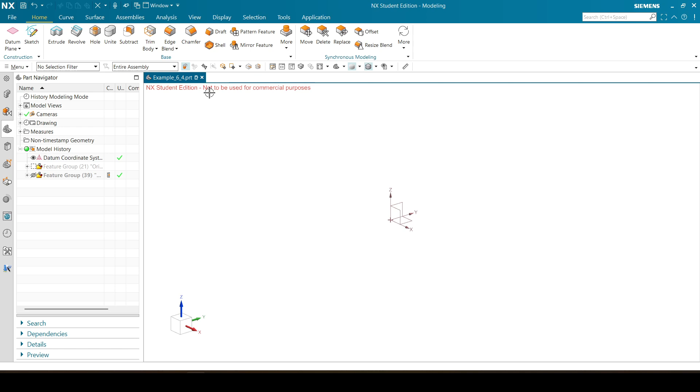Start in the front view, and then we're going to add those 3 circles. I'm just going to add them in roughly here, here, and here. The smallest one has a dimension of 70. This cutout has a diameter of 75, and the outside has a diameter of 100, all in millimeters.

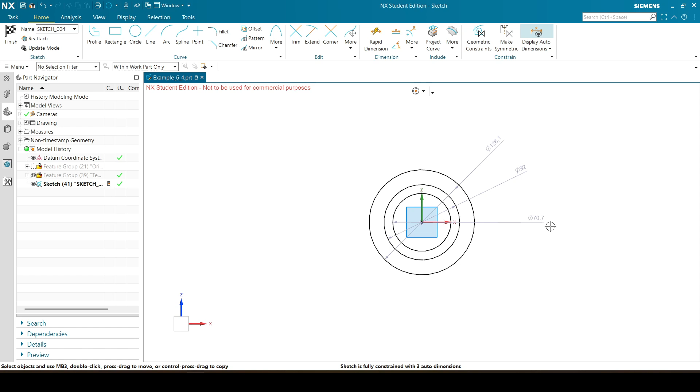Let's move these dimensions so we can see which is which. The first one's basically already at 70 - oh, it didn't apply, there we go. You can double click on them to edit. This one is 75, and this one is 100.

Now I'm going to add this bottom one. You can see its center is in line - well, this is all symmetrical about the ZY plane, it's all mirrored. But I'm still going to make the entirety and not mirror it. It's not too much effort to just do the whole thing.

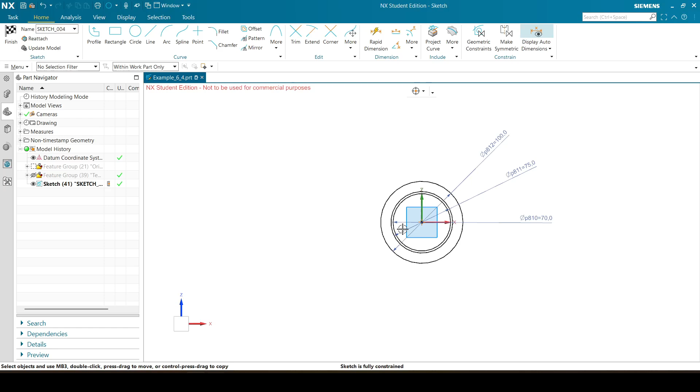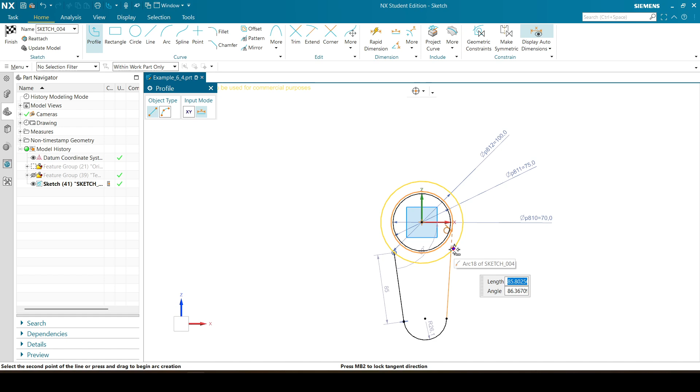The bottom consists of a straight line, so let me start there. You want to make it tangent - you can move it up and down and it will realize you don't want it tangent. But it's also not a straight line, it goes a bit at an angle. Then we go over into a curve, and another straight line that wants to make tangent to everything, but I'll put it in and remove the tangent constraint.

So, point on curve, get rid of that, and immediately delete that tangent before it becomes a problem. This should be in line with the z-axis, so I'll add that point on curve and make these horizontally constrained, which will cause this to be symmetrical.

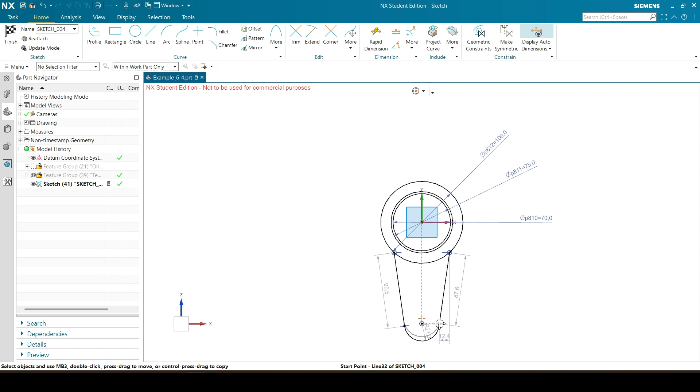I can see this one isn't exactly tangent over here, so I'm going to make it tangent. There we go, now it looks a bit silly, but this radius should be 25, so let's quickly change that to 25 radius.

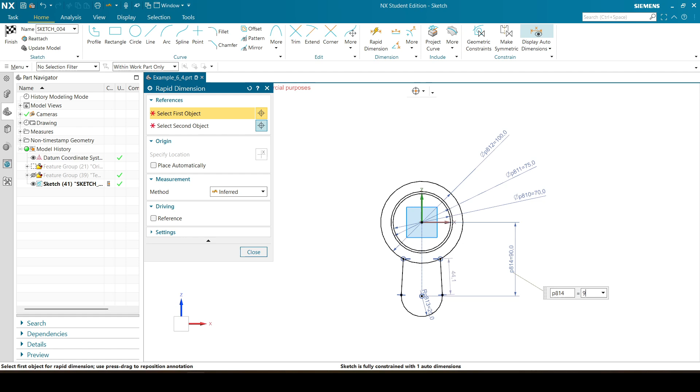The distance is 90 from the horizontal, so let me move this out of the way. There we go, so it's already basically 90, but now it's actually 90. And then we have the angle of this line, which should be 82.5 degrees, also from the horizontal. So 82.5 degrees, there we go.

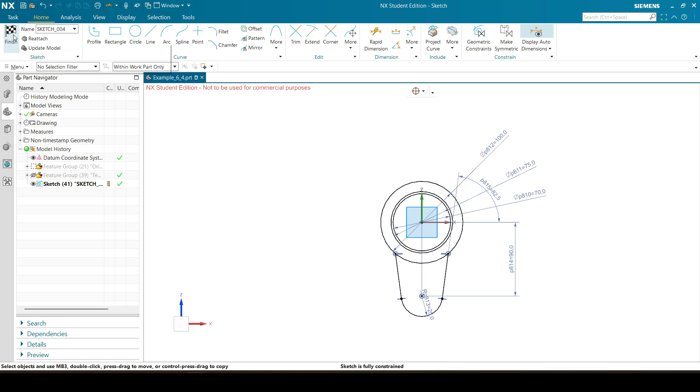Now that's fully constrained. I'm quickly going to show you, because we're going to add the hole here using the hole feature and not by adding a circle. But to do that, I need to add a point to this. The reason is, as I finish here, there's nothing here, so I can't add a hole feature - I'd have to add another sketch to give it a point to reference from.

Or while I'm in the sketch, I can say point, add a point there, close that, finish. Now there's a point that I can use for my hole feature. I'm just going to save it - it complains about the sketch, but it's fine. It's complaining about the detail drawing that's part of this NX file, but don't worry about that.

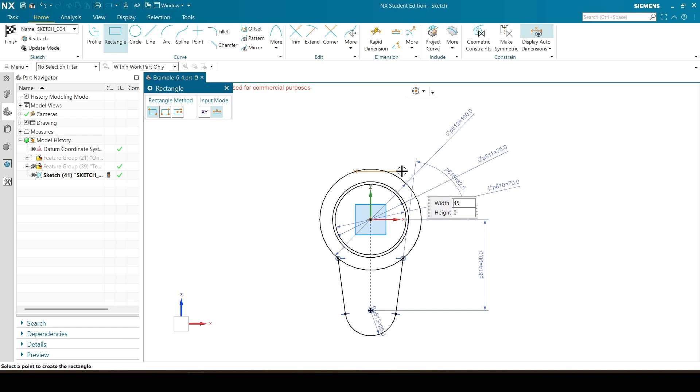Now the top part. I'm going to use a rectangle first to get my rough shape, and work from there. So rectangle, point on curve here. I'm taking it past this side because I want to manually make it point on curve, to be sure it is actually connected. I'm just going to put it in there, then make this point on curve - oh, I misclicked, let's try again. There we go.

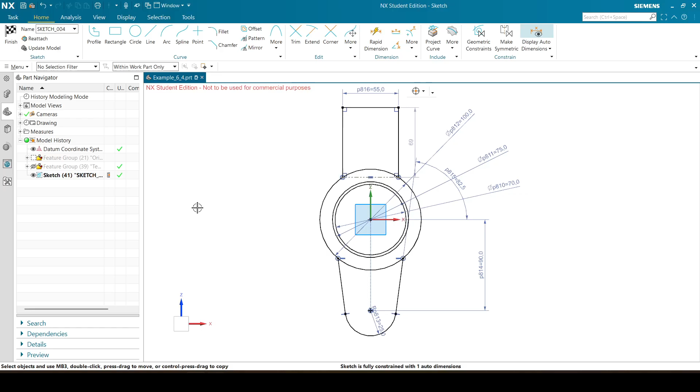I'm going to make this bottom line a reference line since I'm not going to be using it. Then the width is 55. And the height from the horizontal is 100. From the x-axis it's 160. I'll put that over here so it doesn't clutter things up, then zoom out a bit. That's better.

Now for this one, I'm also going to use the hole feature, so I'll add a point. I'll make that in line with the vertical axis, and it should be 105 from the x-axis. So 105, there we go.

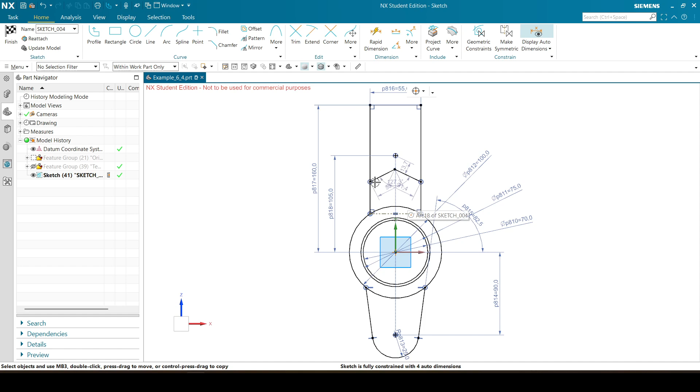Now for this little hat we have here, or roof, or whatever you want to call it, I'll use the profile tool and add it in roughly there. I'll say these two points should be horizontally constrained with one another, and they should be in line with the vertical axis. So now I just need to add this dimension and this dimension.

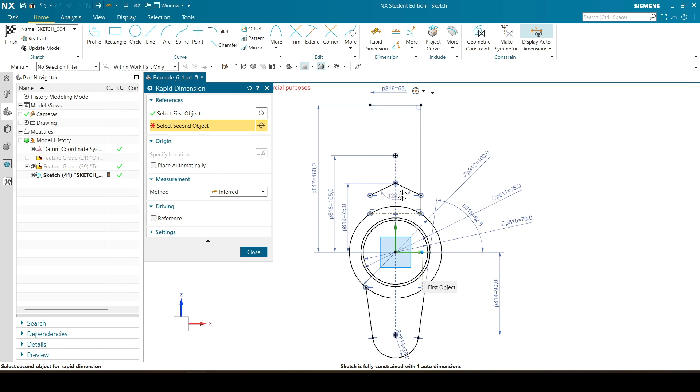So it should be 75 from the top. So from here to here, that should be 75. And the other one should be 60. This one is 60.

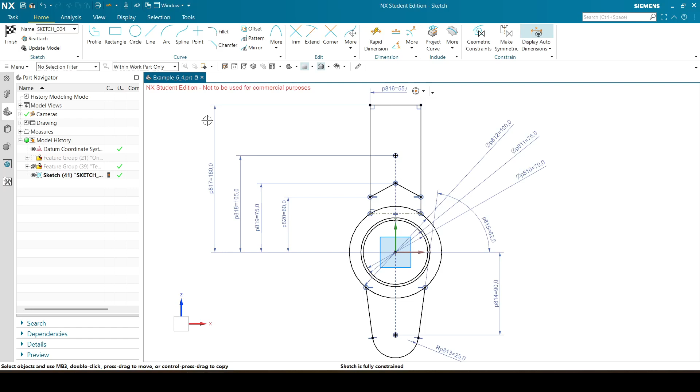Okay, now I'm just going to move these to the side so my sketch is not as cluttered. I'll also move these ones a bit upwards, put this over here, and move this one off to the side. So now I think that's all the detail I'm going to add on this sketch, so finish and just save it.

Okay, so now I can start by extruding. I'm going to first extrude the center part, as it is what everything else connects to. That should be extruded a total distance of 200 millimeters.

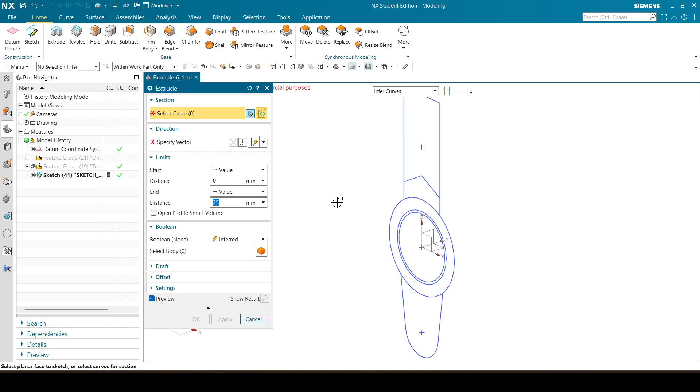So extrude - I'm first going to extrude the entirety without this cutout, and do the cutout afterwards. I want to use region boundary curves. I'm going to use that, move over to this side, zoom in there as well as that. So both of them, and that should be 200. Show result - yes, that is correct.

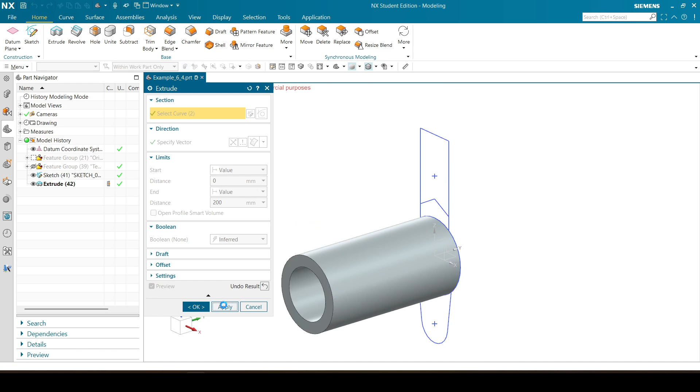Okay, so apply. Then I want to cut this out, but I don't want to select the face of the extrude, because if I change that extrude it could break everything afterwards. So I'm just going to hide it by clicking on the eye, and then select my little annulus here, then unhide that body again.

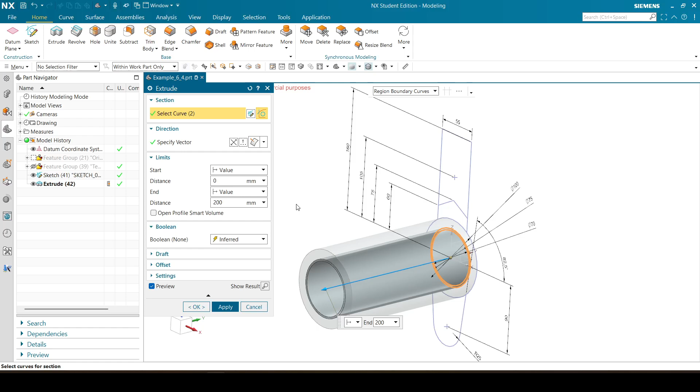And now I want it to be from 80 to 160. So 80 to 160, and it should subtract from that other body. There we go, here you can see it. I will add the radii later.

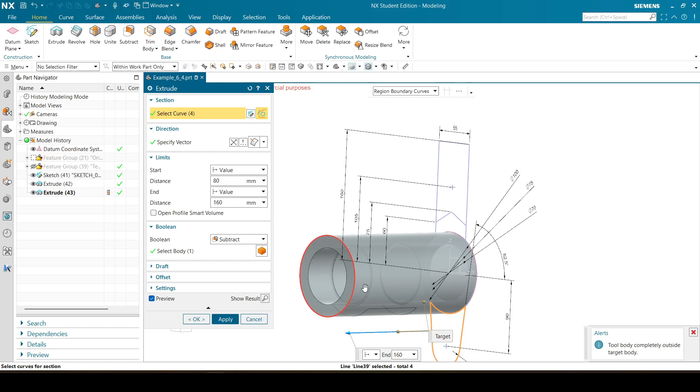Okay, so then I'm going to do this bottom extrusion. It's quite simple - it's that one, and it's going to go from 0 to 50. So from 0 to 50, and it must unite and not subtract.

So we can create only one of these and then mirror it to the other side. Okay, or you can make both - you must decide which is less trouble for you. If you make one and mirror it, if you want to make any changes, you can just change the one.

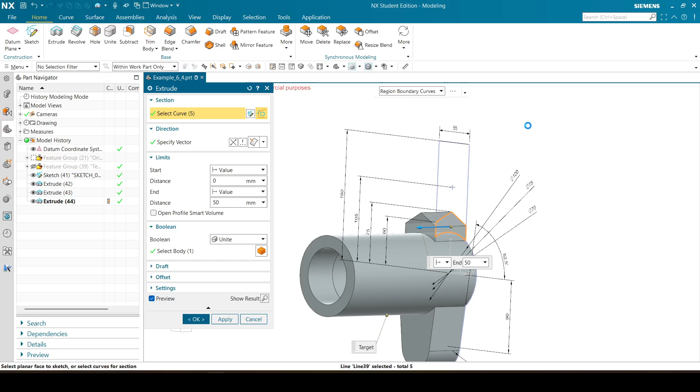Okay, so I'm going to first extrude - let's go extrude this one. So it's from the edge, and it goes either 20 or 40, doesn't matter, because it will be absorbed into this vertical one. So let's just make it 20. And it must unite it to this body. So that's correct.

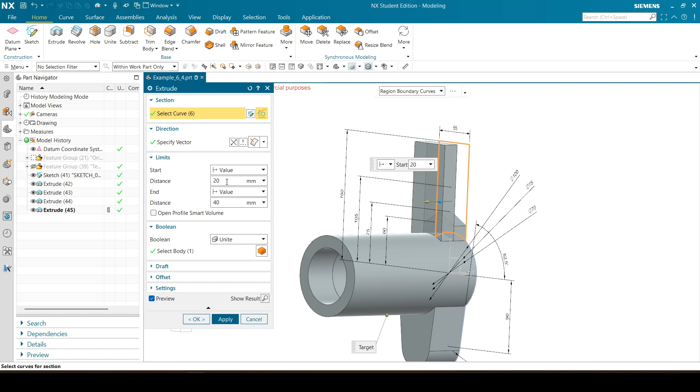And then we want to extrude both of that. So you can also extrude this bottom one 40, and the top one just the top part. You have many ways in which you can do it - this is just the way that I prefer. So it goes from 20 to 40. There we go, and also uniting it. Okay.

Now I'm going to quickly add two of my hole features. So first just this one, on that point over there. There we go, point of the sketch. Let's do that one, and it must have a diameter of 25. See, this moved up a bit, so it's 25 - yes, that's already correct.

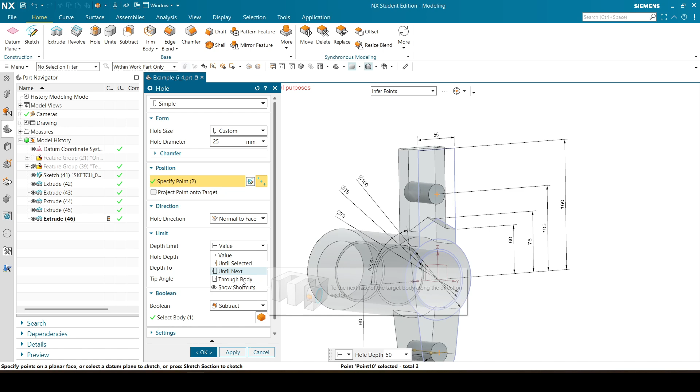And I just wanted the hole depth to be through body, so it subtracts from the body. Oh, and I don't want both points - I see it's selected both. I just want that bottom one.

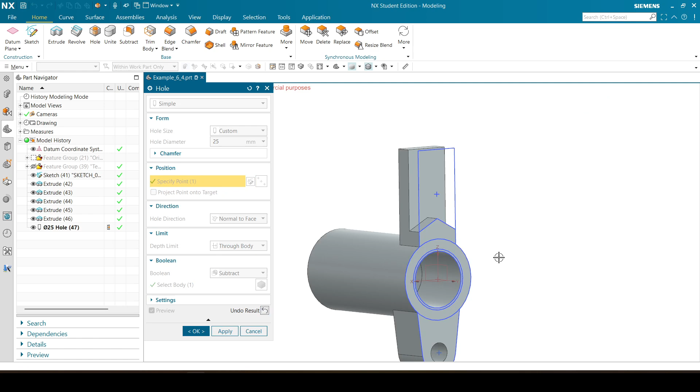I see this one wants to select both points. Okay, we just want that point. So just be careful that you don't select the wrong thing - that's why you preview your results. Okay, so that's correct, let's apply that.

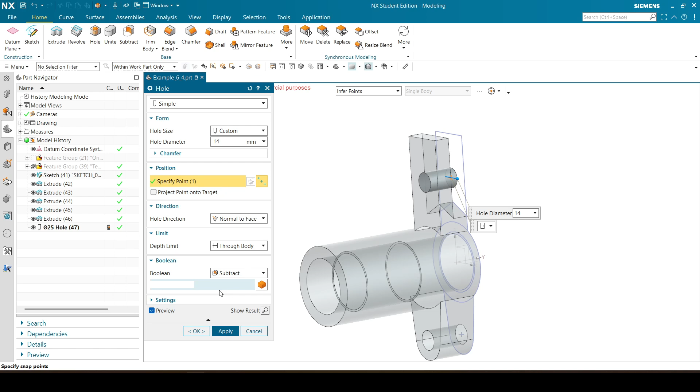And now the top one is a 14mm hole, so over there. And now it's selected incorrectly, so let's right click, select from list, and say this point. And all these are already correct, except this should be 14. Show result - there we go, apply.

Okay, so now to mirror this I will first need to add a datum plane. I'll add this from the XZ plane. Just unhide this again, and then the distance should be in the middle, so that should be 100, or 200 divided by 2. I'm just reversing the distance so that it's on this side. And the plane direction doesn't really matter because we're just using it for a mirror and not to sketch on.

So I'm happy with that. I'll just move it up a bit so that I can see it. Okay, and then I will mirror, and for that I want to mirror this extrude, this extrude, and this hole.

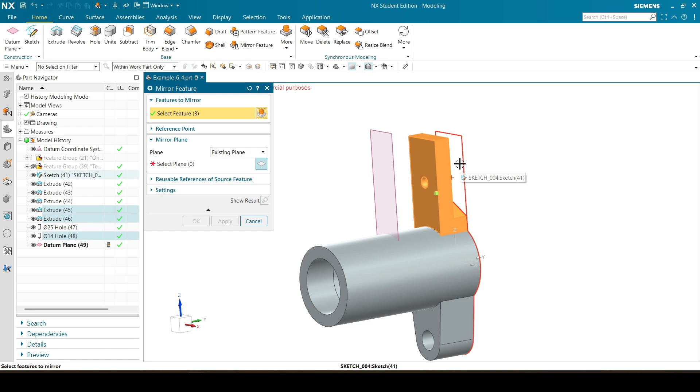So if a mirror gives you issues, so that the body doesn't want to be solid, then you must also mirror the sketch, but if it doesn't, you can just mirror the other features. So around this plane, show results - that looks correct. And to check that this is all one body, it should be, because this entire face sort of highlights itself, but you can just say solid body, and you can see it's all one solid body.

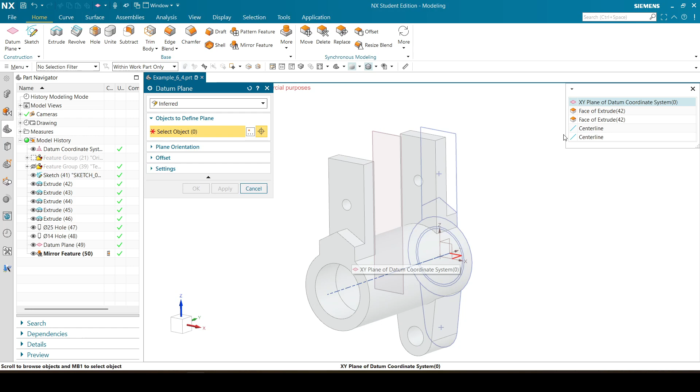Okay, so that's the majority. Now we want this bottom part. So let's see, its distance from the top is 65. So I'm going to create a datum plane there and sketch on that datum plane, using the XY plane, going the other direction, 65.

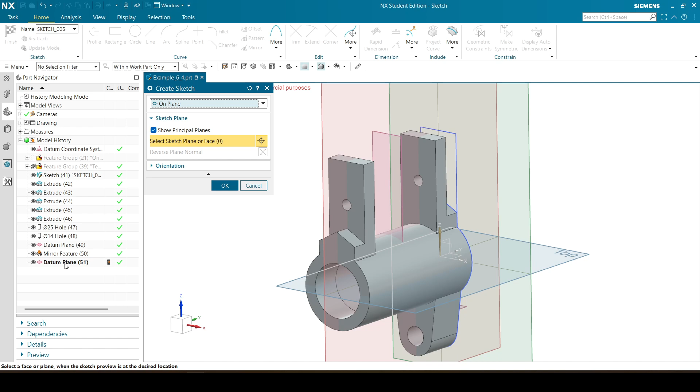And then I want to draw on the bottom. So you see now I'm going to be drawing on the top - plane orientation, I'm going to change that. See, now I'm going to be drawing from the bottom. So now if I say sketch on this datum plane, it will move me over there.

Okay, so this one, let's quickly see - so it is absorbed into this, and then it also goes into this top, but it's flush with that. So we must use our own initiative for some of the dimensions, just to make sure that it doesn't stick out over here or isn't connected, and so on.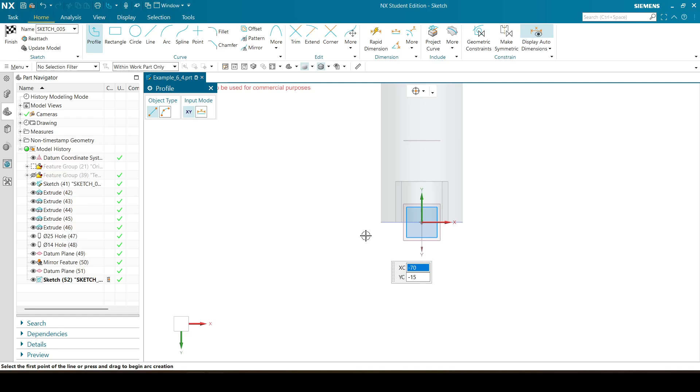Okay, so if we see here, the distance from this point to the center of this hole, and also of this radius, which you can see is indicated from the center, is 60. So let's first draw the outline, shall we? Profile tool, and let me just quickly see, I want to be on this side. So I'm going to just start over here, go up, arc, down, connect. Okay, this should be in line with the y-axis.

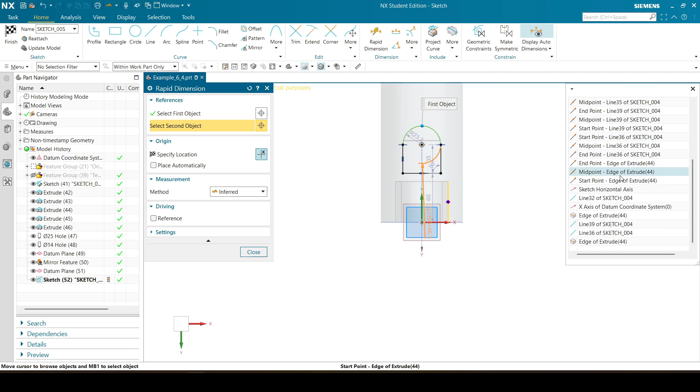So now our distance to that point from the x-axis - let me just quickly right click, select from list, and I want, there we go, the x-axis. So this should be, what was it again, 60? Yes, this should be 60. Double click, 60, there we go. So now I'll just close that.

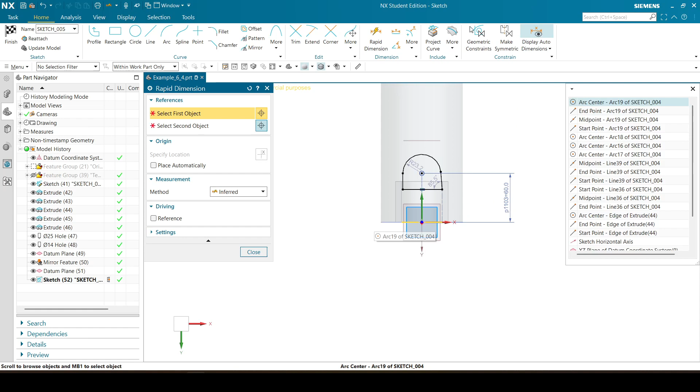So now this edge should just be within this. Okay, so I'm going to decide to make it flush with this. I'm going to make it 50, just so that it doesn't interfere with that other hole that we added. So we're going to go over here, select that, select this, and say 50.

Okay, now you can see it pulled this line strange because it's not vertically constrained. So select that, vertical. Now the sketch is fully constrained. I'll just go zoom out a little bit.

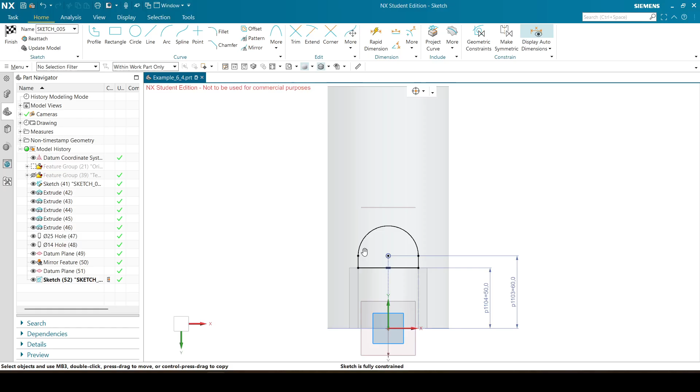But we also want to add a hole here later, so I'm going to add a point and finish that sketch. There we go. So now when I extrude that, I want to first extrude it the other direction, and then I want to go from 0, and now over here I can say I want to go until extended.

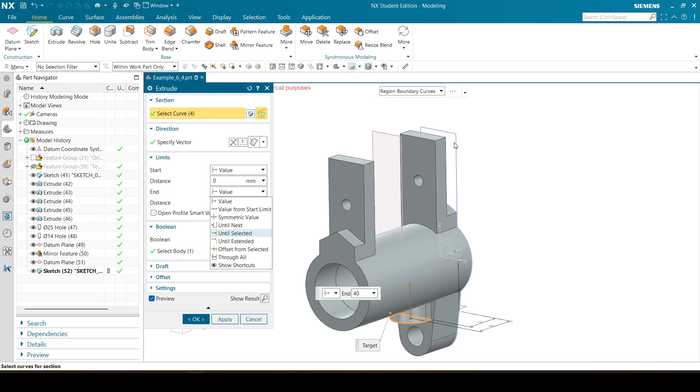Until selected and until extended will both work for this feature because it will be hitting this body. If you want to extrude towards a plane or a face, but it won't actually be hitting that plane or face, then you want to use until extended. But if it will hit it, until selected will work better.

So let's see, until selected, and then it should be this face. And here you can see it is working correctly, it's uniting it, and that will work. For this one, until extended should also work. Let's quickly see. Yes, so both of them work, but until selected is the correct one to use for this.

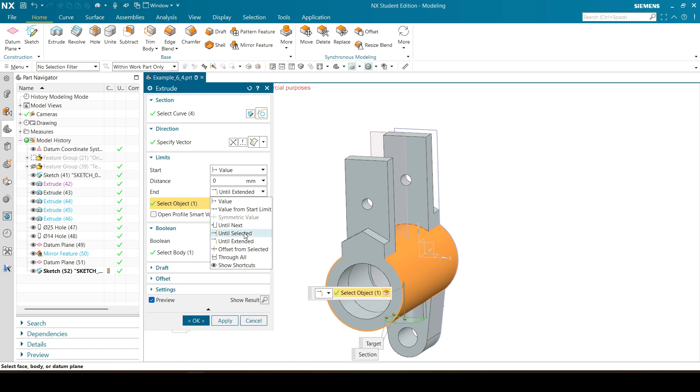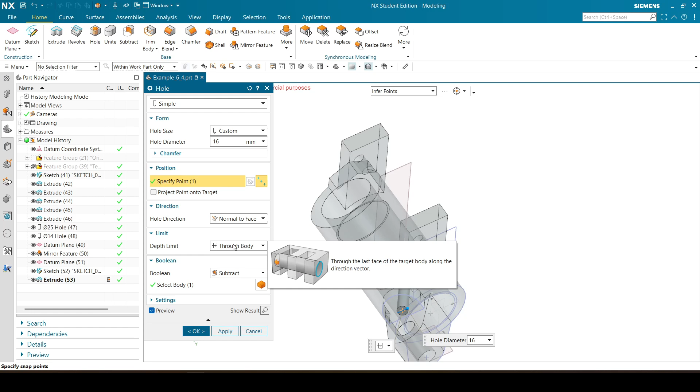Okay, so now that's in, and then I just want to add a hole on this one as well. So over there, I'm not sure it selected the point correctly, so let me just try again. Yes, that point, existing point, and it must be 16 millimeters. And I wanted it to go, so now we must be careful.

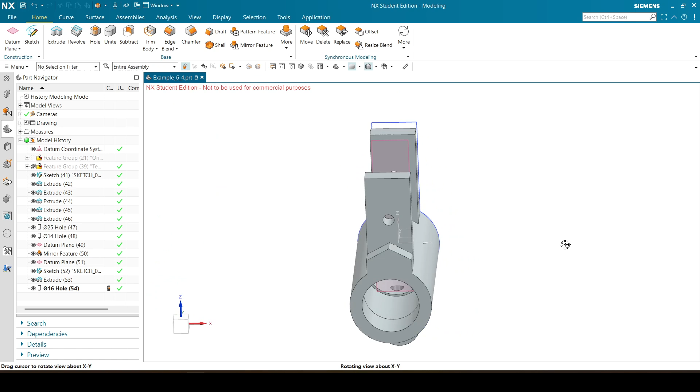It says through body, so now it wants to go through the entire part, and we don't want that. So now we can say until next, so then it's essentially until the next face that it hits, so then it will stop there. Or you can also use until selected, as we had for the extrude. I'll just say until next, subtract, okay, and now we have that hole only in the bottom.

Okay, now we are almost finished. Now we just need to add a bunch of radii. Oh, I actually forgot, I wanted to add the radius here before mirroring. So I'm just quickly going to suppress a few of these, up till the point here, because I want to add a feature that's not dependent on them.

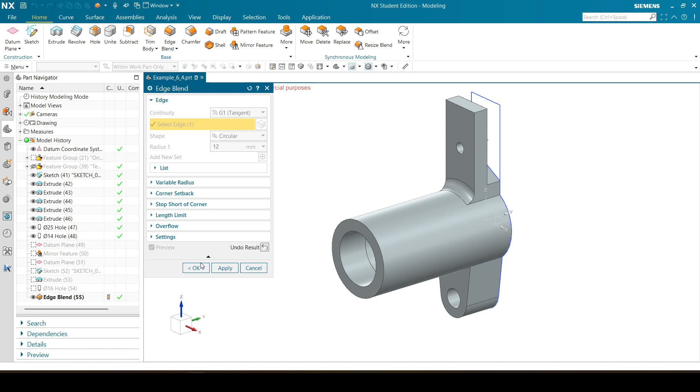So the safest thing is to suppress them, then add my edge blend, which has a radius of 12. So type there 12. This edge, just click there for it to update. Show result. Okay, that's correct. Then we're going to move it up and then unsuppress these.

Now you will see it did not mirror because it is not selected in the mirror. So we just want to hold control and say we want to mirror that as well. Okay.

So now we can add our edge blends here at the bottom. So this one over here has a radius of 10, and then these smaller ones at the sides, and you can see it's all connected going over here.

I'll give you a check there. Actually, no, this one has a radius of 12, and these ones have a radius of 5. So always check very carefully if they are the same or not. So those ones are 5, that one is 12.

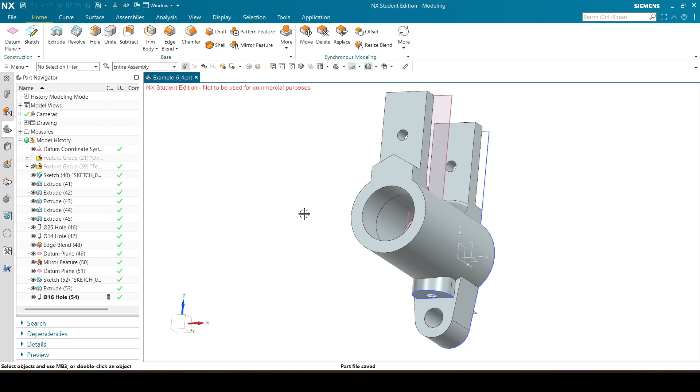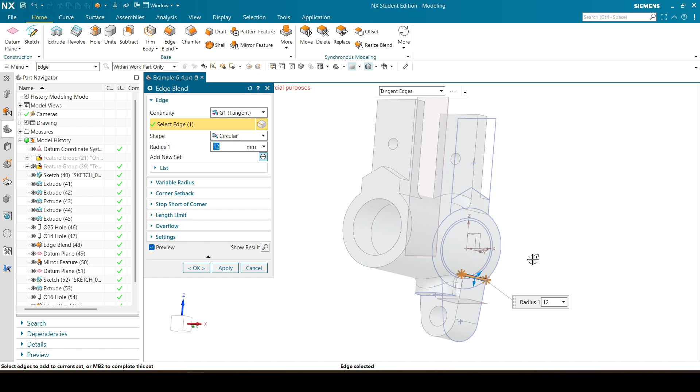Okay, so edge blend, this one is 10. Show results. Okay, apply. Then we want to say 5 for those ones and those ones. Apply. And then finally 12 for this one and this one, showing a result. There we go.

Zoom in a bit. Okay, that looks like it all applied correctly. Okay, so I'm going to save it real quick, and then I'm also just going to hide some of my sketches and datum planes to tidy up my sketch a little bit.

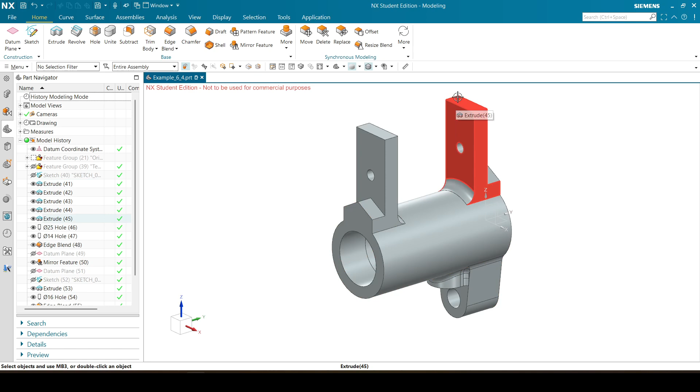Oh, I almost forgot this inside one. Okay, so let me quickly add a section plane in here. So I'll quickly see here. It was at view. Here we go.

Okay, so I'm going to say edit section, so it will then automatically want to create for you a section, and it already, so now you can see I can select different planes that I want to cut it from.

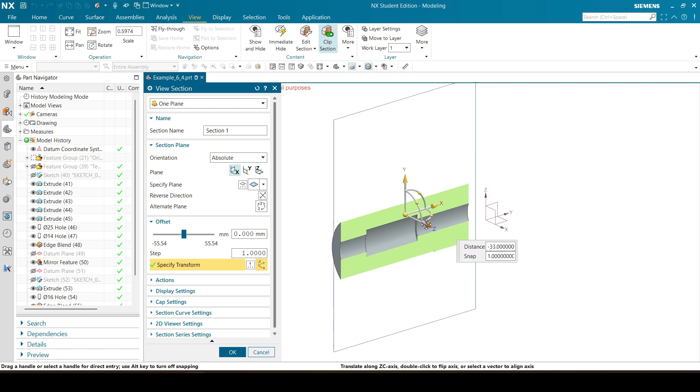So I want this plane so I can see this cross section, sort of like this, and then I can move it this way or this way, but I want it to be in the middle. Let me just check here. Okay, it's already in the middle there, that's fine. Say okay, and now I can add the 5mm edge blend.

So just say 5, otherwise it's going to be too large for the actual geometry. 5 over here, 5 over there. Just be careful to select the right edge. There we go, the inner one.

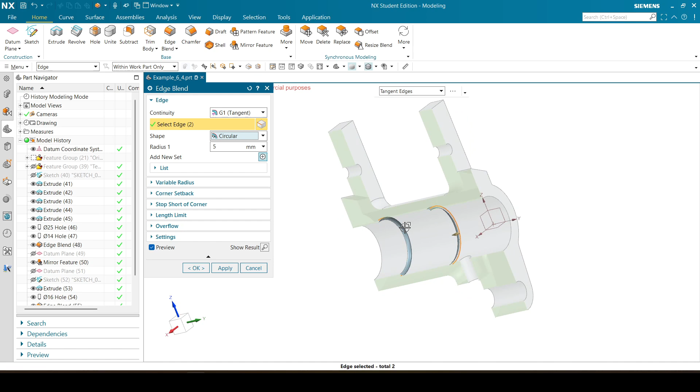Okay, so now that's correct, and now I can just say in the view, clip section off. So then you see it is correct. So essentially that just hides half of the sketch, or that part that's clipped off, so that you can actually see on the inside and make changes over there.

Okay, so now the material that we applied, so now to check if we actually did it correctly, moment of truth, is the material AISI 304 annealed, stainless steel. Solid body, this one, there we go, and it's this material. So I used that for these ones as well.

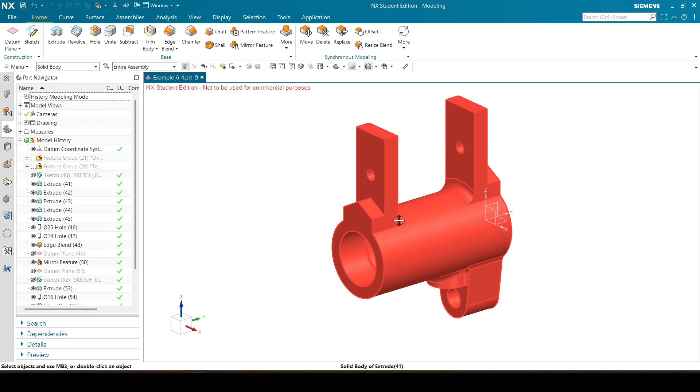I'll just suppress them for now. So that one's correct, and now I want to measure. Where am I? There we go. Measure, select from list, solid body, and I want all of these ones. Okay, so this is the one that we already have, and now to unsuppress the original feature.

So these should now be the same, and they are not the same. So now the fun thing is to figure out why they're not the same, because they are supposed to be the same. Okay, so this is indicative of me missing a feature. So let's quickly see which one I missed.

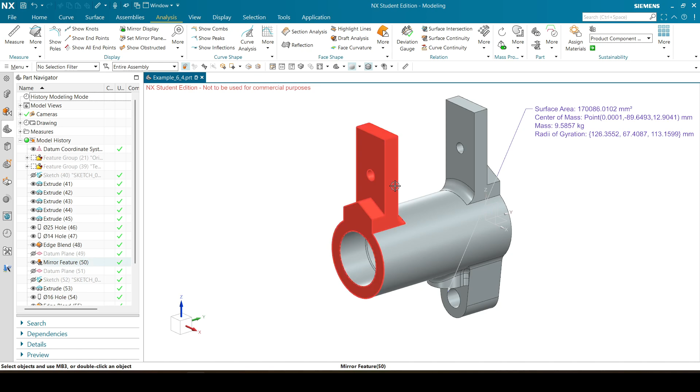I'm first going to hide or suppress this one again. Actually, yeah, it would be kind of unfair of me to just see what's not the same between the two and try to figure it out, because you don't have that option. So let's go back over here and see what we missed. I'll spare you the pain of watching me read through everything, and then I'll just quickly pause the recording and come back to you.

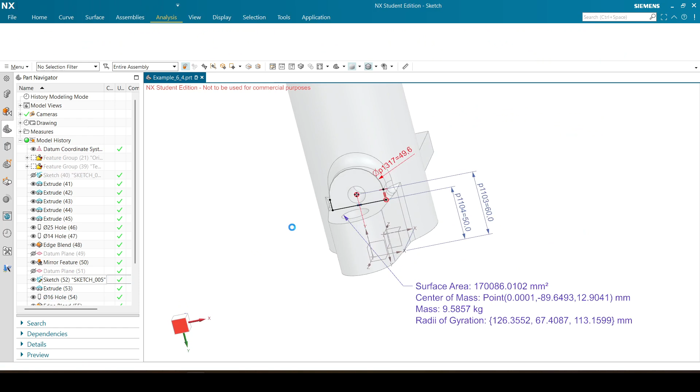Okay, so I'm back. I realized what I did incorrectly. You can see here, if you look at the relationship between this little circle and this arc, just get the correct one, it doesn't exactly look the same over here. So when I added this one in, you can see it's over constrained, because I quickly checked this radius, oh sorry, this diameter is currently 50, where the diameter should then be 40.

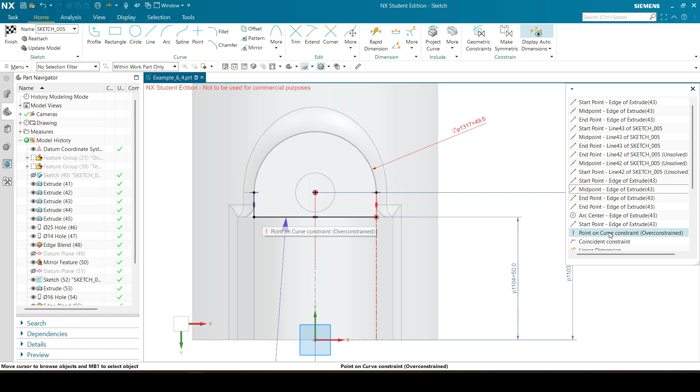So what happened was, I have here a point on curve constraint that I accidentally put in when making it. And then I just saw, oh, it's fully constrained, and I moved on. But I never actually put in the dimensions that I was supposed to put in. So I'm just going to delete that one. And now I can make this 40, as it actually should be.

There we go. Now it's fully constrained, the same way I specified it over here. You can see it. And then say finish. And now, if we actually compare to the original, then it is finally the same.

Okay, so that's again a lesson in being very careful to actually put in the dimensions that are given to you. I was in a rush and didn't check properly, and I just saw fully constrained and moved on instead of checking whether I actually specified everything correctly. Yeah, it happens to all of us.

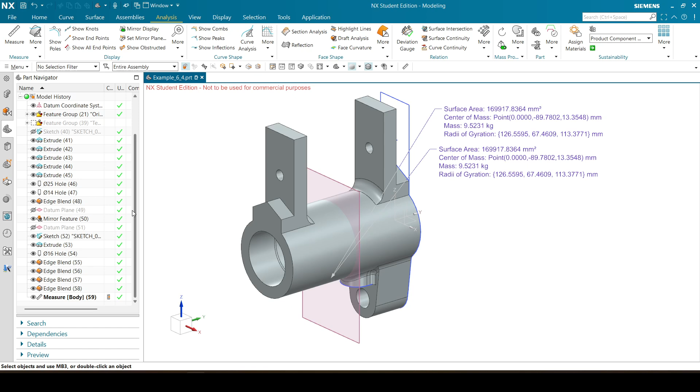That's why you should always be very careful when creating a part. I'm just going to suppress this again and hide this sketch. There we go.

So remember, especially in tests, especially when you're under pressure, make sure that you specify everything the same way that it was given to you, or at least specify all the dimensions that are given to you. Because if you're specifying fewer dimensions than were given to you, that means you're missing something. You're going to have something that's fully constrained, but it may not be correctly constrained.

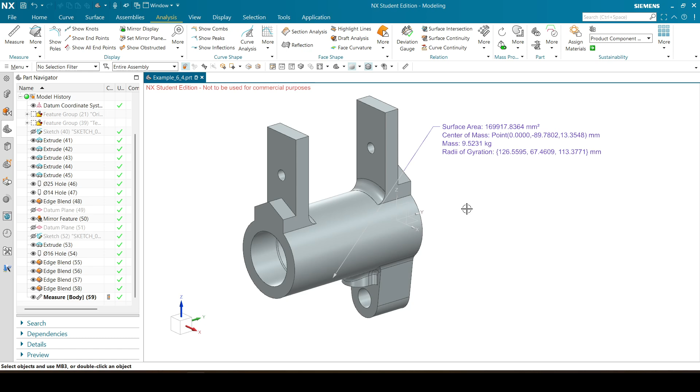So learn from these kinds of mistakes, because it happens very, very easily, especially when you're under pressure. Okay, good luck with the rest of the work and the homework. Cheers.